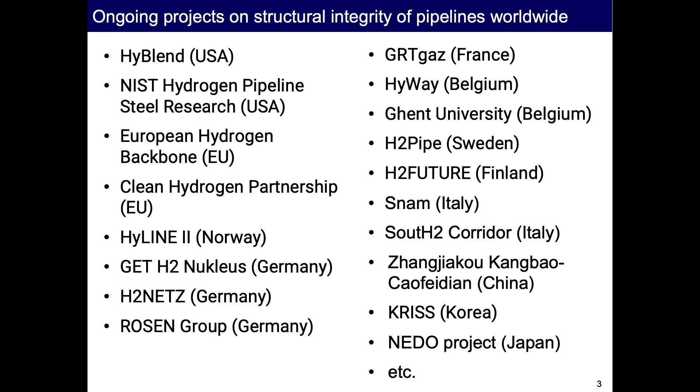Last night, I made an investigation about the ongoing projects on the structural integrity of hydrogen pipelines worldwide. I found so many research projects. We, of course, are doing them, and so many experimental data are being reported from the world. But I understand we have some unsolved problems on the HE properties in hydrogen pipelines. For example, the effect of microstructure and cleanliness. Sometimes they are investigating vintage materials.

This is of course important, but also the effect of gas pressure that Chris presented today, the effect of temperature, and gas impurity. So many people are tackling various programs. And the embrittlement mechanism. This is also a typical problem in Japan: the effect of seismic activity and the remaining life after an earthquake. And also from the practical viewpoint, development of strength design and optimization, codes and standards. So we have so many problems.

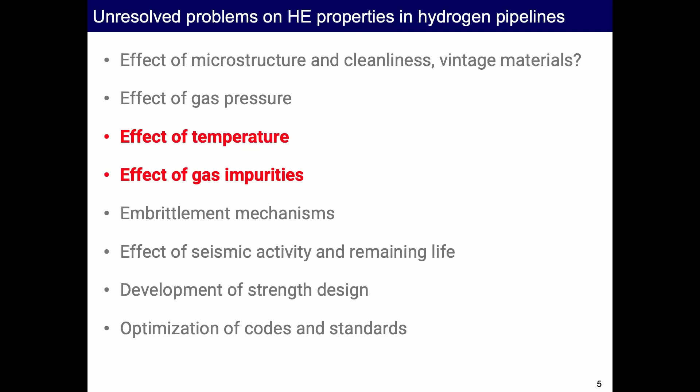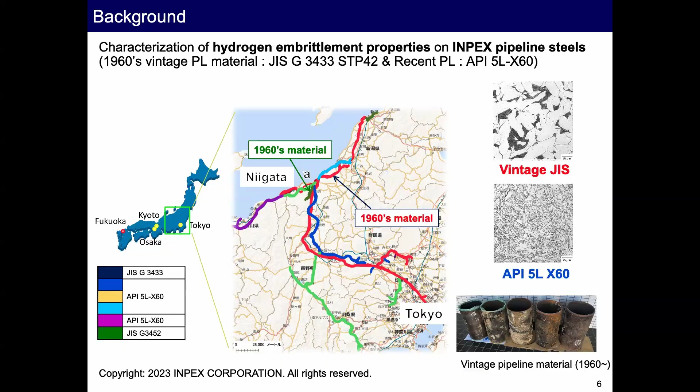In this presentation, I'd like to focus on the effect of temperature and gas impurities. So this is the background. The experimental data that I'm showing were obtained in a collaboration between INPEX, a Japanese company, and Kyushu University. In Japan, they are operating a pretty long natural gas pipeline in the middle of Japan, and they are planning to repurpose the existing natural gas pipeline for hydrogen.

From the world, they are reporting a great amount of experimental data, but most of the experimental data are obtained at room temperature, not at low or high temperature. But if we look at the climate, in some cities we experience very cold temperatures. In Japan, we sometimes experience minus 20 degrees C or minus 30, even lower. That's why, to ensure the safer use of the pipeline, we need to obtain experimental data at various temperatures.

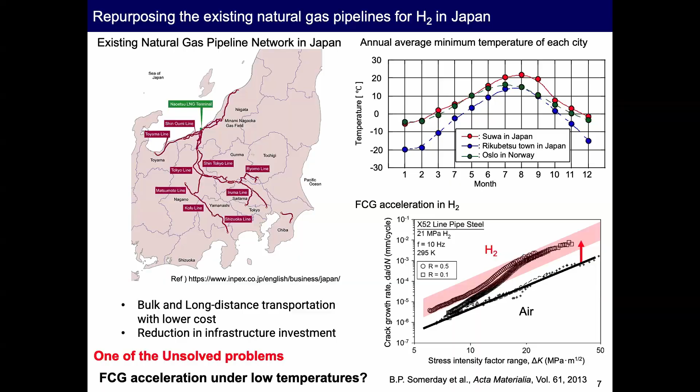It is well known that the fatigue crack growth rate drastically increases in hydrogen gas. Some people are trying to investigate the effect of temperature, but under cathodic charging, not in hydrogen gas. So the objective of this study is this question: how about the temperature dependence of the fatigue crack growth properties of X60 pipeline steel in 10 megapascal hydrogen gas?

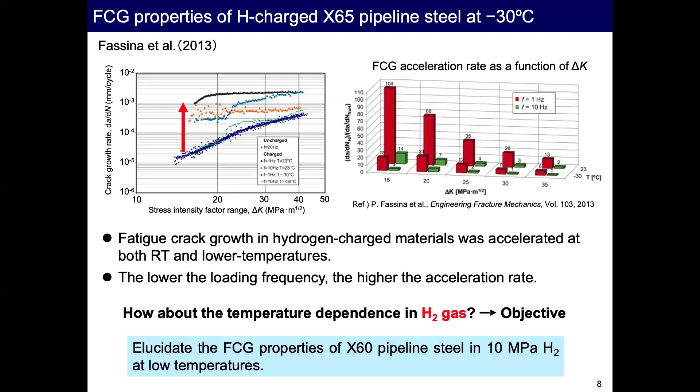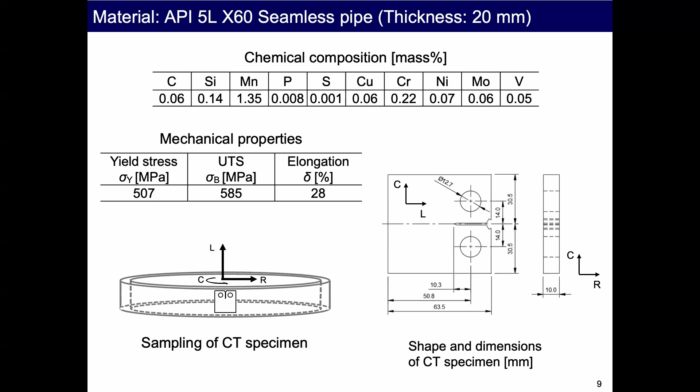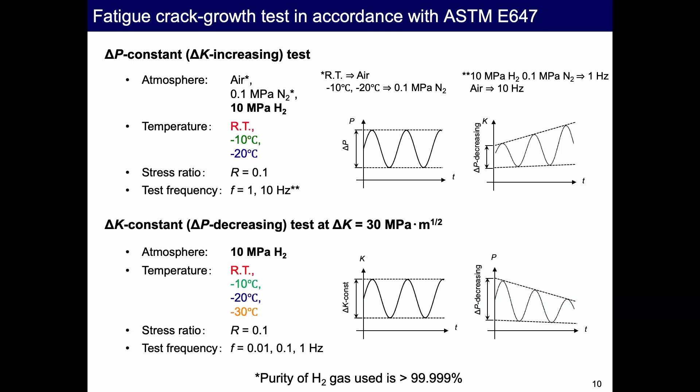We prepared this X60 seamless pipe, as shown here, and we made fatigue crack growth specimens. This is the shape and dimension. We performed two types of fatigue crack growth testing in accordance with the ASTM standard. One is a delta P constant test at three different temperatures to obtain da/dN versus delta K data. The second one is the delta K constant test to obtain the relationship between the acceleration ratio and frequency, also at various temperatures.

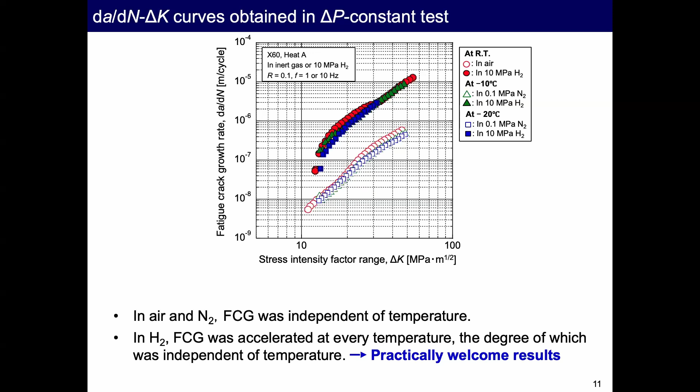If we observe the fracture surface, for example, at delta K of 30, this is the fracture surface at room temperature, -10, -20. This is air or nitrogen, and hydrogen on the downside. Briefly, I can say that the fracture morphology was similar between room temperature and lower temperature.

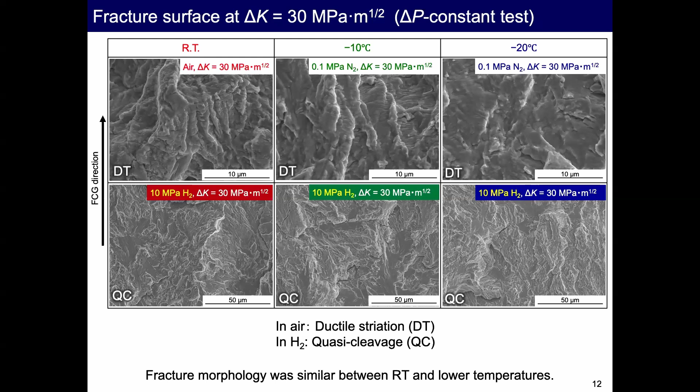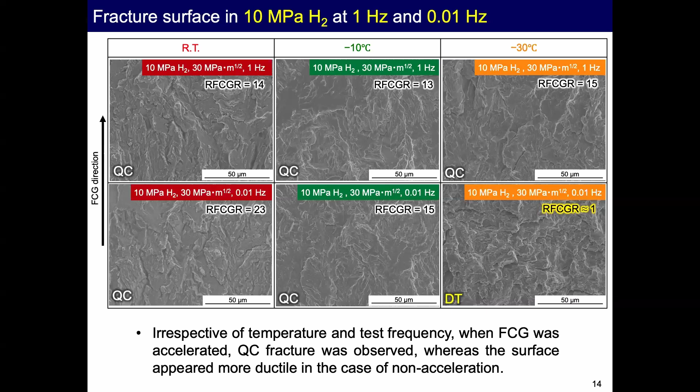We made a fractographic observation, but I skip it. The question is why? Why do we have this kind of deceleration at lower frequency? The first possibility that reminds us is the inhibitory effect of oxygen impurity. Maybe everybody may think about it.

As you may know, the Sandia team reported the effect of such impurities. They reported that the transition point is increased with an increase in oxygen impurity, and under oxygen impurity, the fatigue crack growth acceleration is mitigated with decreased test frequency. Based on physical modeling, they propose this kind of equation. But according to this equation, the lower the temperature, the greater the inhibitory effect.

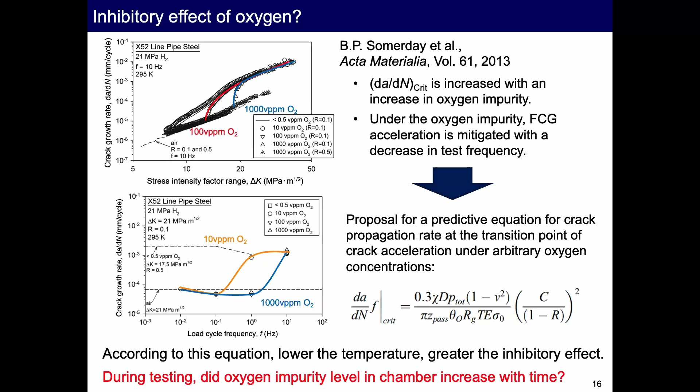So firstly, we thought about the possibility: during the testing, did the oxygen impurity level in the chamber increase with time? We always think about it. To confirm this kind of tendency, we performed additional testing in hydrogen including oxygen impurity at 100 volume ppm. This is the result. At room temperature, fatigue crack acceleration was mitigated at every test frequency like this.

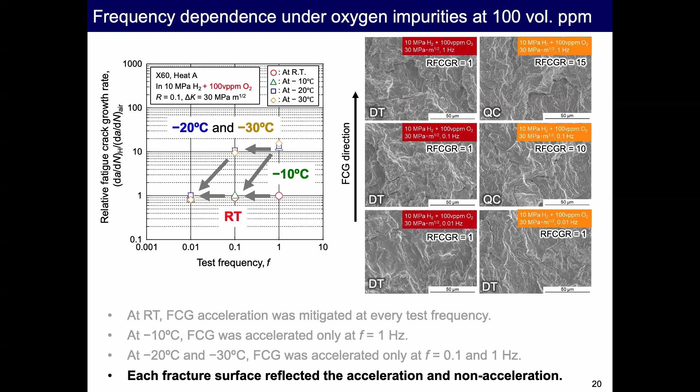But at -10 degrees C, the fatigue crack growth was accelerated only at 1 Hertz. At -20 and -30 degrees C, the fatigue crack growth was accelerated at 0.1 Hertz like this. Each fracture surface reflected the acceleration and non-acceleration. This is a summary of the frequency dependence. This is the result in hydrogen gas including oxygen impurity, and this is the result in pure hydrogen.

It's very complicated. I cannot give the interpretation at present. But if we think that oxygen impurity is the reason, there is some discrepancy. The result suggests that the mitigation effect of oxygen impurity is less effective at lower temperatures.

How much time? Five minutes? Yeah. Good.

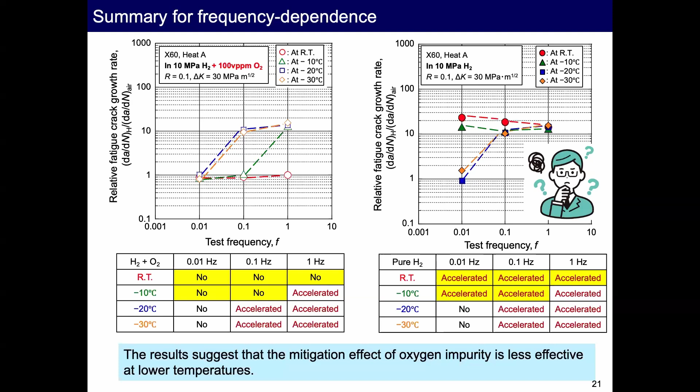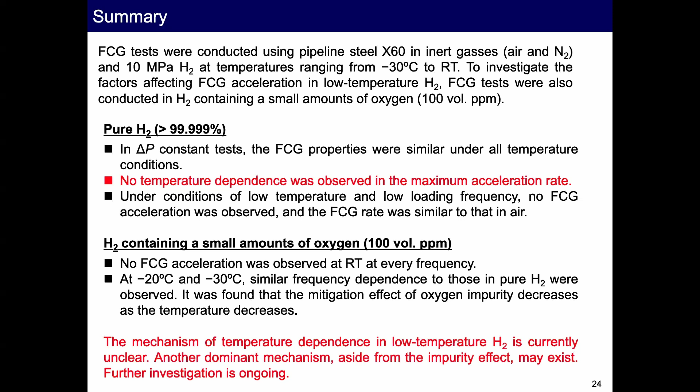Anyway, I have no clear answer to show you today, but I'm pursuing the mechanism and influencing factors. This is the summary of my talk. I'd like to emphasize that no temperature dependence was observed in the maximum acceleration rate down to minus 30 degrees C. That's good news. But the mechanism of the temperature dependence in low temperature hydrogen is currently unclear. Probably another dominant mechanism aside from the impurity effect may exist, and further investigation is ongoing.